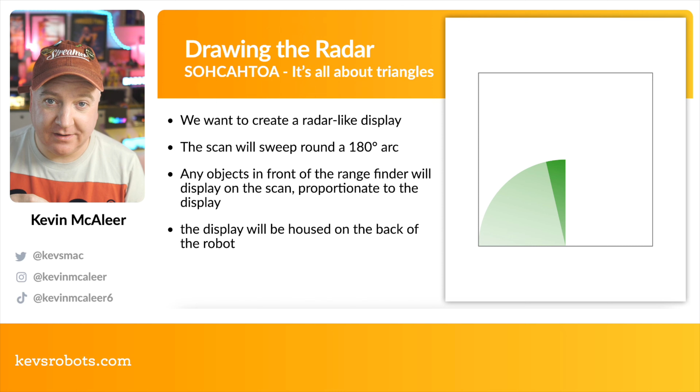So the display will be housed on the back of the robot. Currently, as it stands, I've not built that part. The display and the robot are slightly separate, but we will get that in the fullness of time.

I've chosen to use PicoGraphics, which is a really great graphics library, particularly for drawing vector graphics, invented by Pimoroni. Now, there is some native graphics functionality within MicroPython - there's a frame buffer library you can use, which has things like the line drawing function, which we're going to use here. But I'm using PicoGraphics, which means I've used the Pimoroni MicroPython.

So if you're using Thonny, you can actually choose to install that. If you just hit the boot select button when you're powering up your Pico, you can then select to install Pimoroni MicroPython. So PicoGraphics has this line primitive, and the way it works is it takes 4 different integers.

It takes an x1, a y1, an x2, and a y2, and then draws a line between those 2 points. The x1, y1 is the start point of the line - that can be anywhere on the actual display, it doesn't have to be top left, it can be anywhere, the line algorithm will figure out how to draw that. But you do need to have those. So if you remember your computer graphics, X is across, Y is down. So we need a start and end position.

So the display itself - I'm using these really nice 240 by 240 color displays. They use this ST7789V display driver, and that's actually built into the Pico Explorer base unit, so it's really nice and easy to use this without having to do much configuration. Like I said, it's got 240 by 240 pixels, it's square. It's got this in-plane switching display, IPS display, which means it's got a really nice viewing angle, so depending where you are, you can sort of see it from any angle. It uses the SPI bus as well, just to make it really easy to plug in from a wiring perspective - you just need 4 wires.

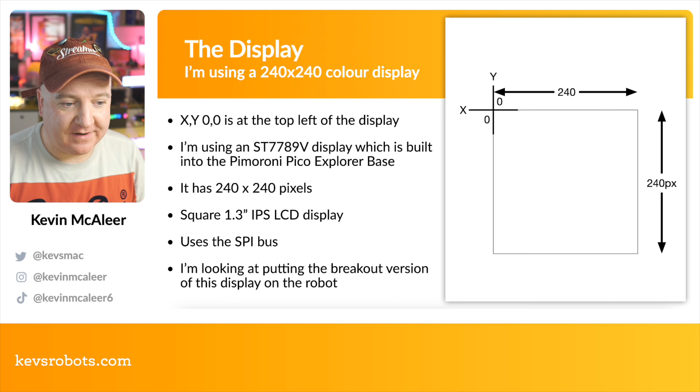And I'm also looking to put the breakout version of this on the back of the robot. Pimoroni do a breakout version, which has 5 header pins - I think one of them's probably not used, or it might be the brightness, I think you can adjust on one of the pins, the CS pin. So yeah, that's what we're going to be using in the long term. If you're going to build along with this, I'll put a full bill of materials on the site when I've finished building this - that's what we're shooting for.

So how do we draw the sweep? I was thinking about this - how do you draw an arc, in fact, on computer graphics? Well, what we need to do is we know the length of the line that we're going to draw, because we can start out and just say if our display is like 240 wide, let's split that in half - so that's 120. Let's give ourselves a little bit of breathing room, so the line will be 100 pixels long. So we know the length of the line. We know the angle of the line that we're going to draw as well, so we know those 2 things already.

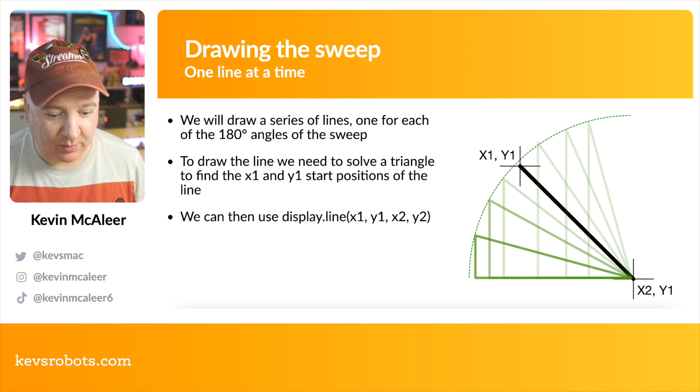So we want to draw this series of lines, one for each of the 180-degree sweeps that we're going to make. To draw the line, we need to solve these triangles and find the x1 and y1 positions, because we always know the x2 and y2 positions - that's in the middle of the bottom of the display, so it can sweep round completely. Once we've solved our triangle, we can use it to do the x1, y1, x2, y2, and then draw the line, and we can choose what colour we want the line to be, and so on. So drawing the sweep, this is what we need to figure out - we need to solve the triangle to figure out the positions of x1, y1. We know what x2, y2 is - like I said, it's the middle bottom of the screen.

So y2 is the bottom of the screen, whatever the height is, it's the very bottom of that. So 240, or 239 if we're starting at 0, which displays usually do. And the middle of the display is whatever the width of the display is, and we can actually grab that using PicoGraphics - you can just say get bounds to get the actual width of the display, just in case you're using a different size display. And then you can basically just say slice that in 2, divide by 2, to get the x2 position.

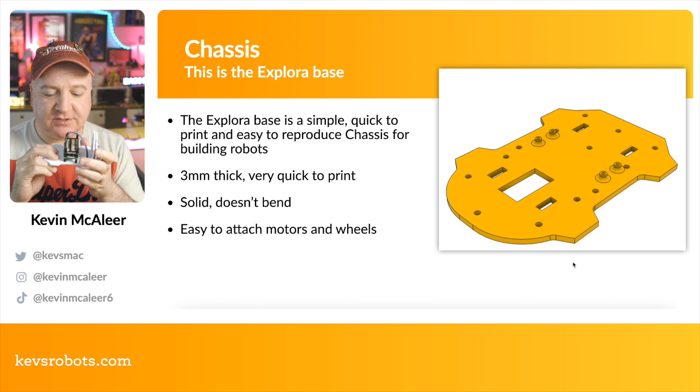And it's really simple to put together. I'll show you the blueprint in a second so you can create these yourself. It's 3mm thick, and that seems to be a really good thickness. It doesn't bend, it's really solid, and it's really quick to print. Doesn't take very long at all. So it's solid, doesn't bend, and very easy to attach your motors to as well.

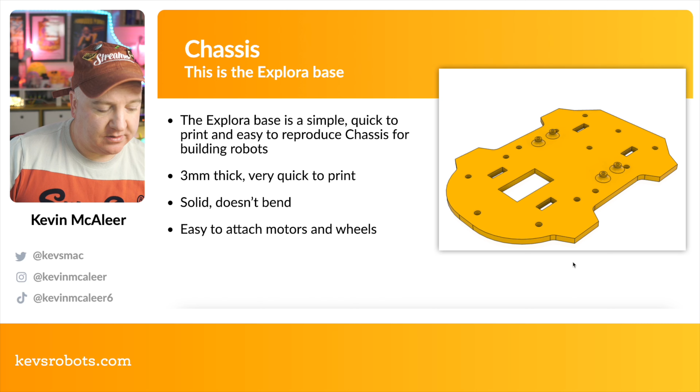Underneath I've got some N20 motors, and I've got a little motor holder that just screws into place with 2 M3 screws and nuts. We'll have a look at some captive nuts as well on one of the diagrams in a second. So this is the blueprint.

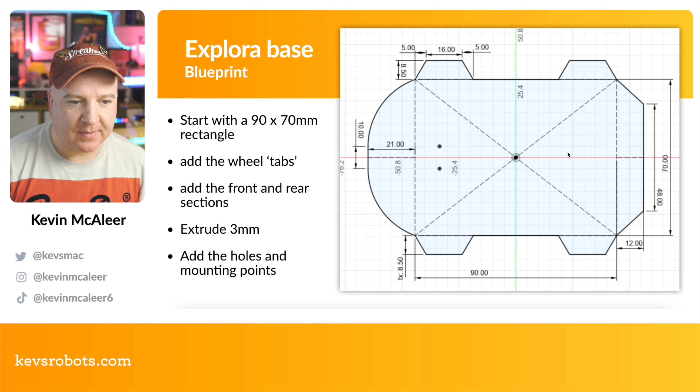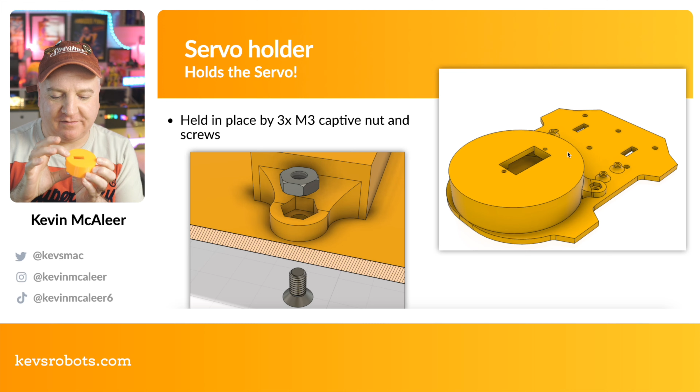So the servo holder, this is the piece - it's a sort of shorter version of this. That one was the full height of a servo, so I could test that out on the desk. This one for the robot is slightly slimmer, and the servo pokes through the bottom of the chassis as well, so there's a little space for that.

And it's held in place by 3 M3 captive nuts. There's one sort of hidden inside that you can't see on the model, but there's one there as well. The way these captive nuts work, they're a really good way of securing 3D printed parts together. You just have a little hexagonal nut piece that goes in, and you've got the M3 bolt that goes through the nut, and the two are squished together.

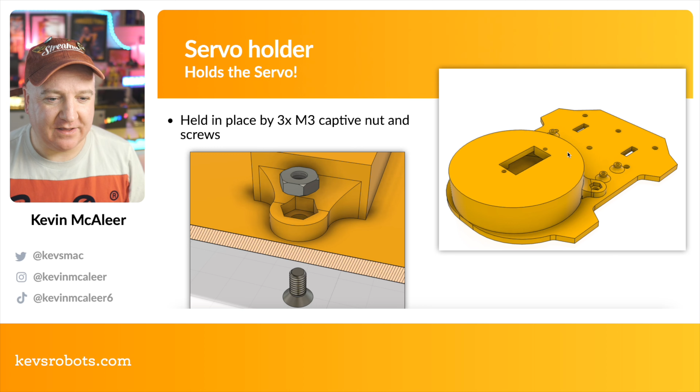You don't have to over tighten them, they're pretty secure, and it really holds everything in place. So I really like including these in my designs - it's a really nice way of making things easy to print because they're separate parts. So yeah, the servo screws in from underneath.

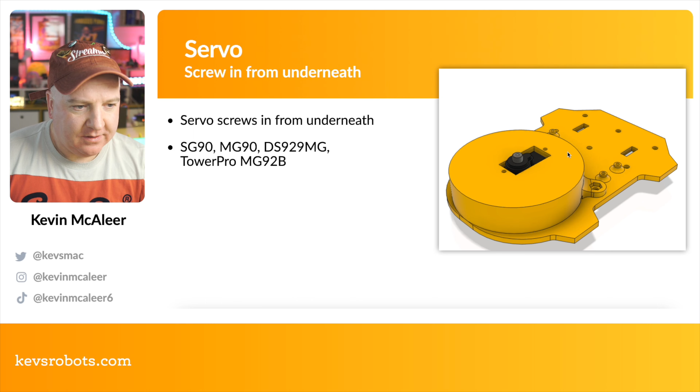So I'm using a Tower Pro MG92B, which is this one here. It's almost the exact same dimensions as an SG90, the cheaper ones. I've got a slightly better quality one just because I wanted this robot to be as accurate as possible, and I found some of these cheaper SG90s can be a little bit flaky. So for this particular robot I wanted more accuracy, and paid a bit more for one of these - I've got a whole pack of them. So it works with the MG90s, SG90s, the DS929MGs which I've used in other robots in the past, as well as these Tower Pro MG92Bs.

Okay, so next is the rangefinder holder. This attaches to the servo horn, and the servo horn attaches the rangefinder holder to the body, giving it that pivot point in the very middle where we need it to be. What we do need to make sure, before we actually put that little screw in place - you'll get a little bag like this when you buy your servos, with a tiny screw that you screw into the spindle of the servo - is that your servo is centered and your rangefinder thing is pointing forward.

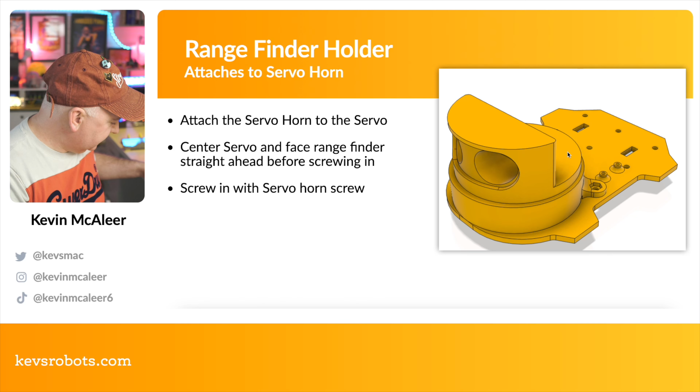Now I have got my desk of bits here. Just unplug that. You can see the time there as well, which is good.

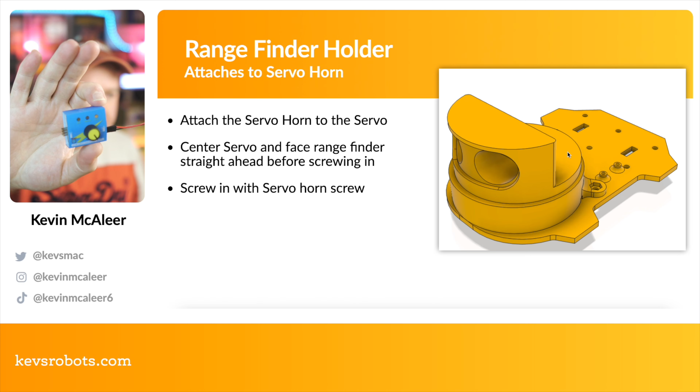What I've got on my desk here is just a little servo consistency tester or something, and it basically just has a little knob on there, and you can plug in a number of different servos, like I think 3 of them. You apply some power on there and it'll just set the servo, and you can just dial this, so you don't have to have anything else connected to it. You can just use this to sort of set it. So there's a little button on board as well.

If you click that, you can set it between 1 of 3 different settings. I use that to make sure it's completely centered before I screw everything into place.

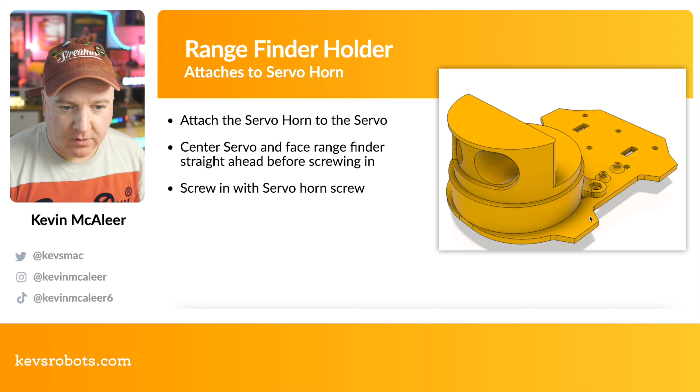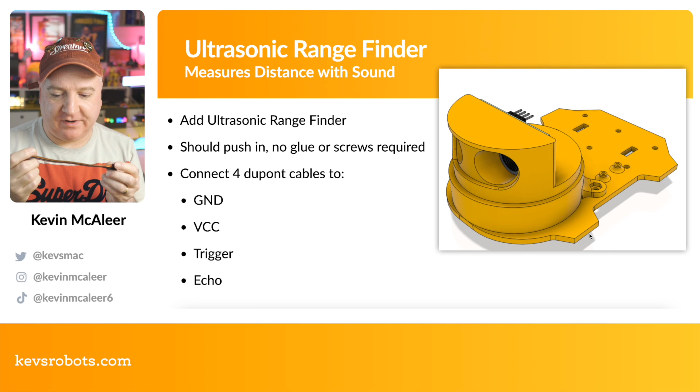The ultrasonic rangefinder simply pushes into place on the back of the rangefinder holder. You don't need any glue or screws, and then you connect up using one of these DuPont cables. I've got a pack of these, and depending what you've got on the other end, you might want male to male, male to female, or female to female, whatever works. You just need 4 of these: ground, voltage, trigger and echo.